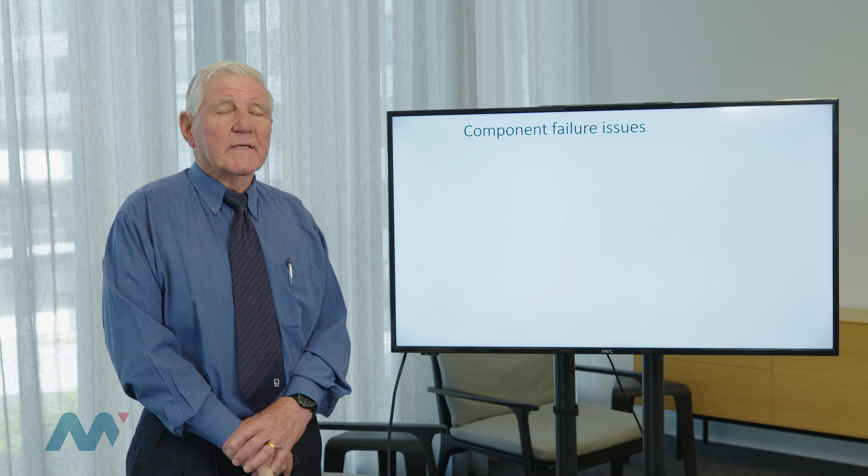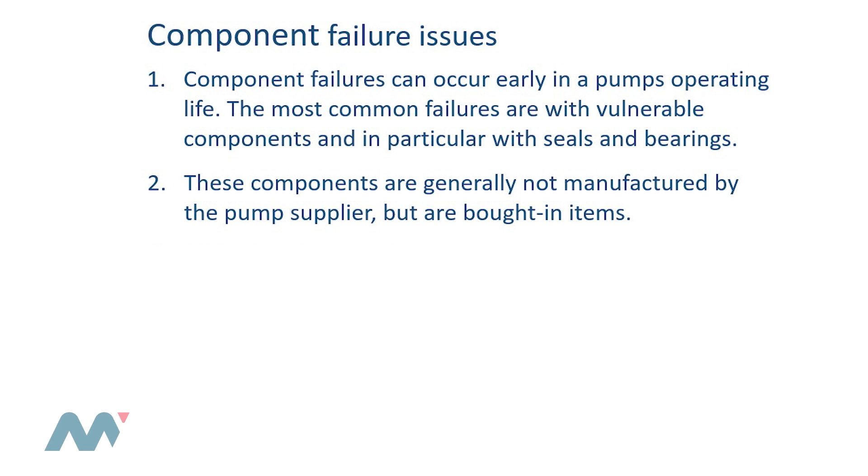So, in particular, vulnerable parts are seals and bearings. These components are not made by us as the manufacturer. They are made by a supplier as a bought-in item. So the quality of those things is within our control, but we're not actually manufacturing them. Most pump parts are covered by the manufacturer's warranty, but in fact, the bearings and the seals, that's a commercial decision that you guys make, how much you warranty those items.

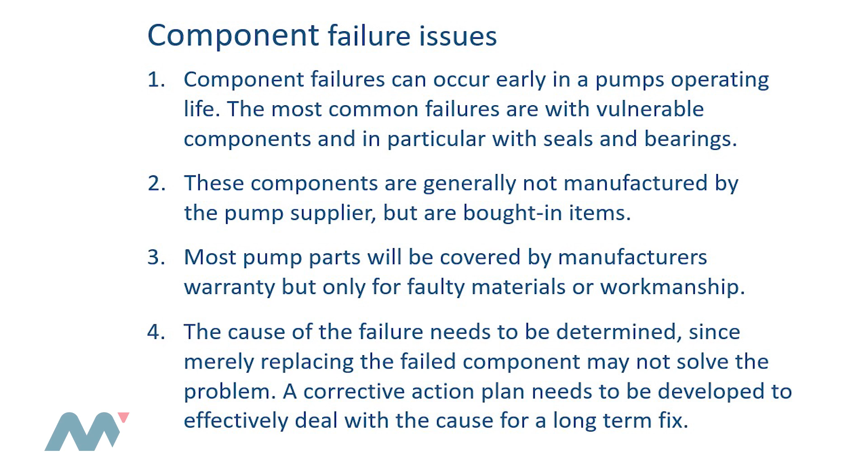The cause of failure needs to be determined, since merely replacing the bearing or the seal may not deal with the cause problem. So you've got to isolate what actually made that seal fail, what actually made that bearing fail, before you can have an ultimate fix on the product.

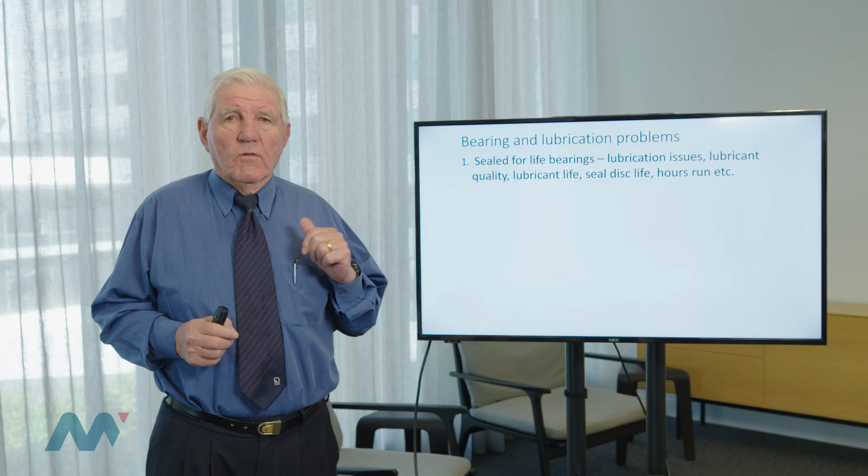Sealed for life bearings. That is, for me, an interesting subject to discuss, because whose life are we sealed for? When you break it down, a bearing is only as good as the lubrication that it sees. And in a sealed for life bearing, we've got an inner ring, outer ring and balls and a cage to hold it in position. We then put in some lubricant, and then we put two seals on either side of the bearing, and we call that a sealed for life bearing. The life could be 5 minutes, it could be 25 years. So what does sealed for life really mean? It's all down to the quality of that lubricant.

Bearing temperatures are an issue. If you've got your shaft that's misaligned, that will heat up the bearings faster than an accurately aligned shaft. So we've got to look at the operating conditions. Are we unreasonably loading the bearings beyond their design point?

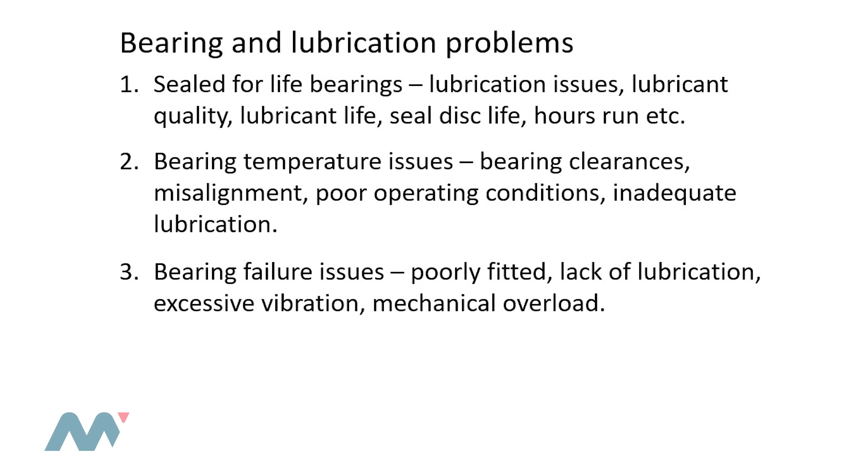Bearing failures are often quite complicated issues because the fit of the bearing rings inside the casing and onto the shaft are critical to the life of the bearing. Normally they're going to be a push fit onto the shaft and a sliding fit into the casing. And in that situation, that's giving the bearing the maximum opportunity to align itself and run smoothly as a rolling element. So we should be trying to avoid things like vibration and mechanical overload on the bearings, and we'll get more life out of them.

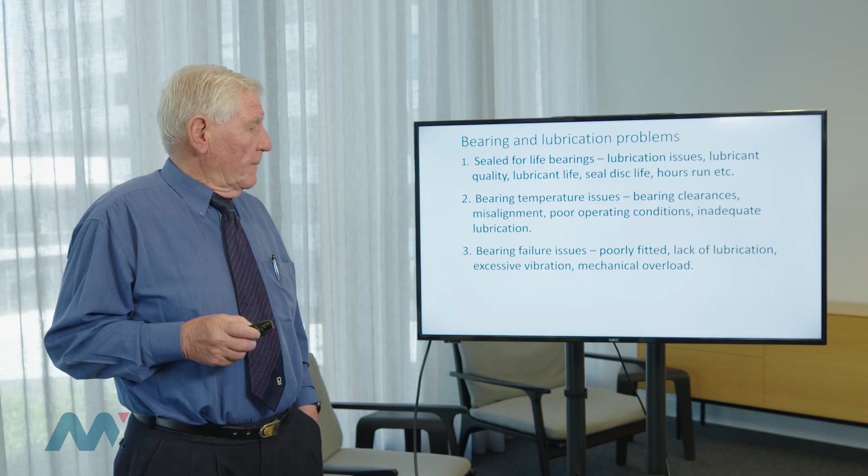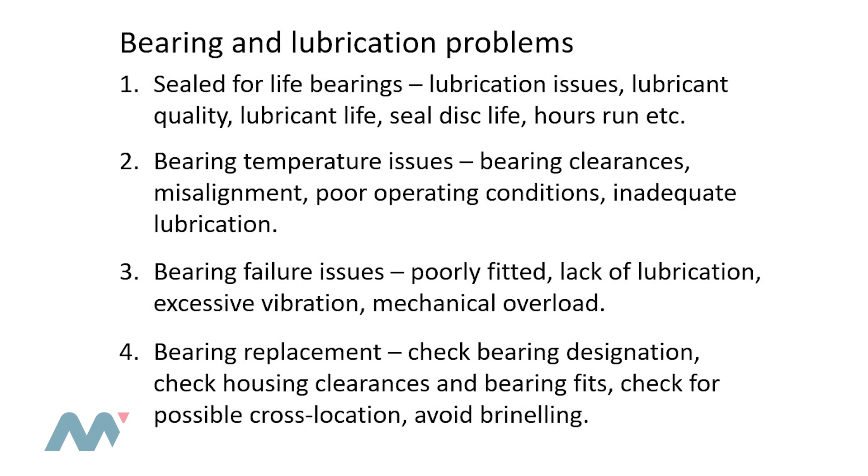When you replace the bearing, check carefully to see what bearing you're actually taking out, because the outer ring will give you the size, a 6306 or 6308. That's the size of the bearing. But it might also have a C3 behind that, or a C4. That is the internal clearance in the bearing, which tells you what will happen if that bearing heats up. So a C3 clearance is larger than standard, and it means that the temperature that bearing can sustain is a little bit higher than one that's got a standard clearance. So all these things you need to be aware of.

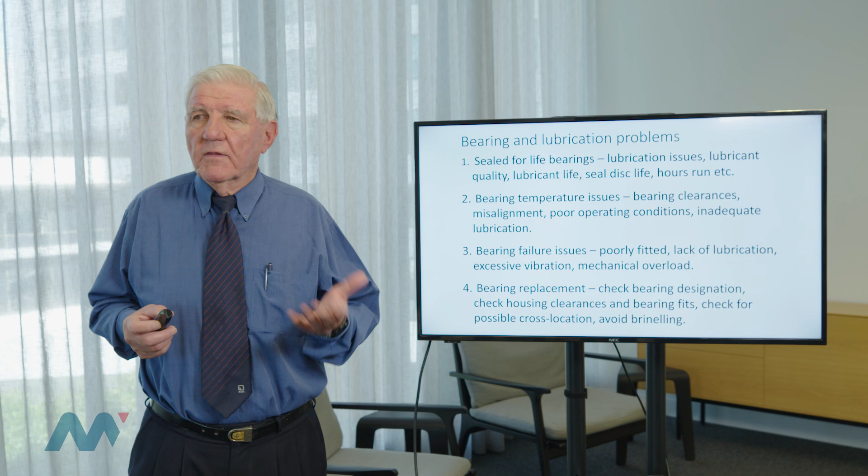Don't just put any bearing that happens to look the same. Make sure you're replacing with the bearing that the manufacturer included. Have a look for corrosion, have a look for Brinelling damage and so on. Because if you put a damaged bearing back, it's almost certain to fail.

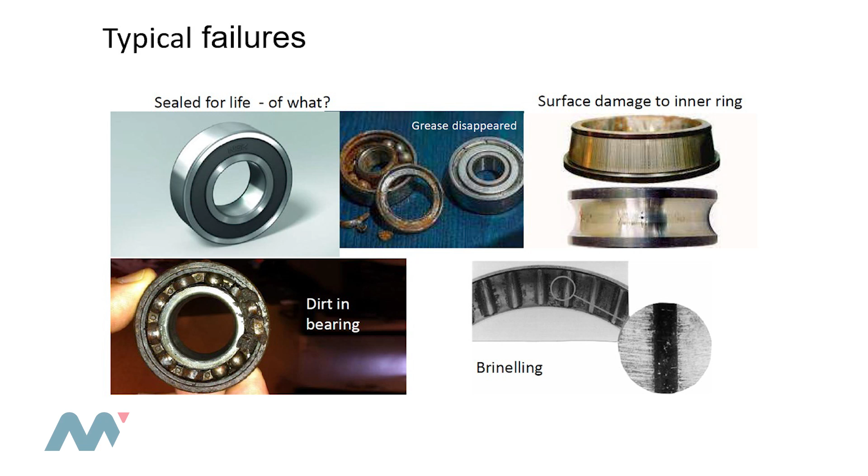Here are some typical situations where bearings have failed. Here's our sealed for life bearing. Here you can see the seals, which are fixed in the outer ring, which doesn't rotate, obviously, and the inner ring is the one that rotates. So there's a rubbing between that inner ring and the seal surface. And behind that seal is grease, and that can be high temperature grease or just standard grease. Look to the pump manufacturer's recommendation for the sort of grease that they use.

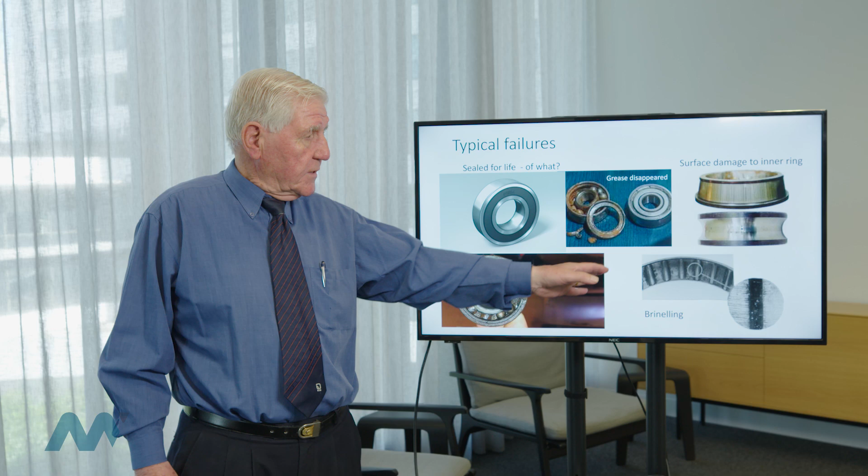Grease disappeared. Look at the state of the bearing. Bearings need lubrication. They're spinning maybe at 2,900 RPM, and those balls get hot without grease. This is sort of standard surface damage. This is Brinelling. That's what Brinelling looks like, and this is in a barrel roller bearing. You can see that the barrel rollers have been stationary, but they've been fretting, they've been vibrating, and they've actually damaged the outer ring of the bearing.

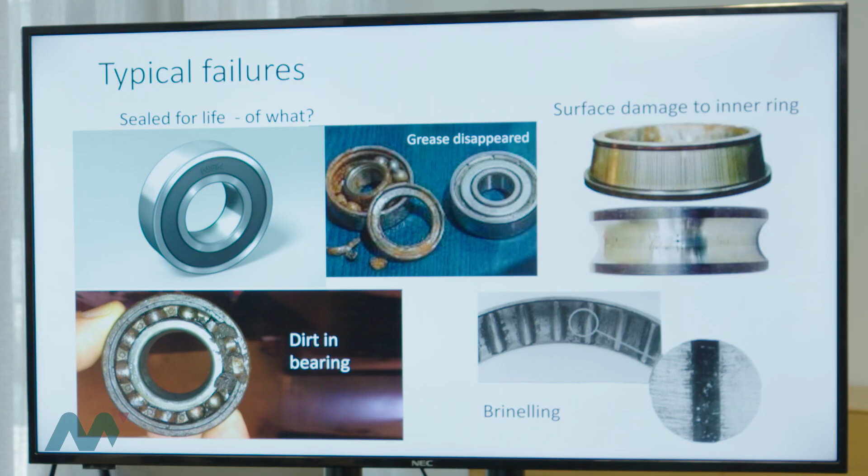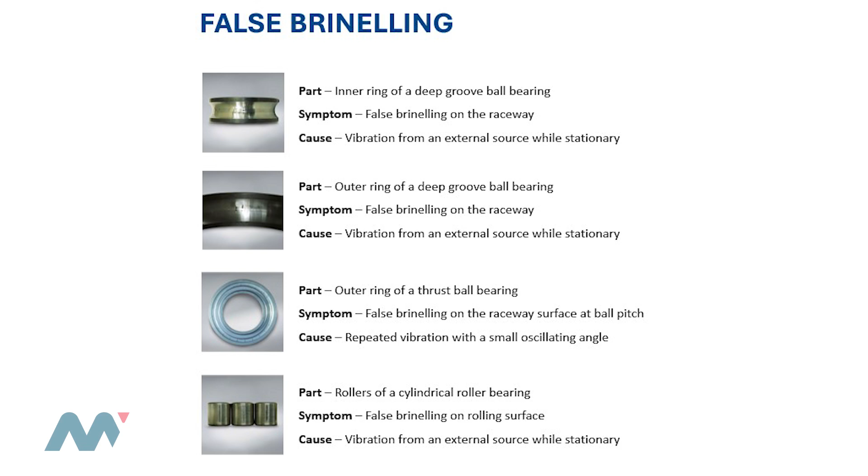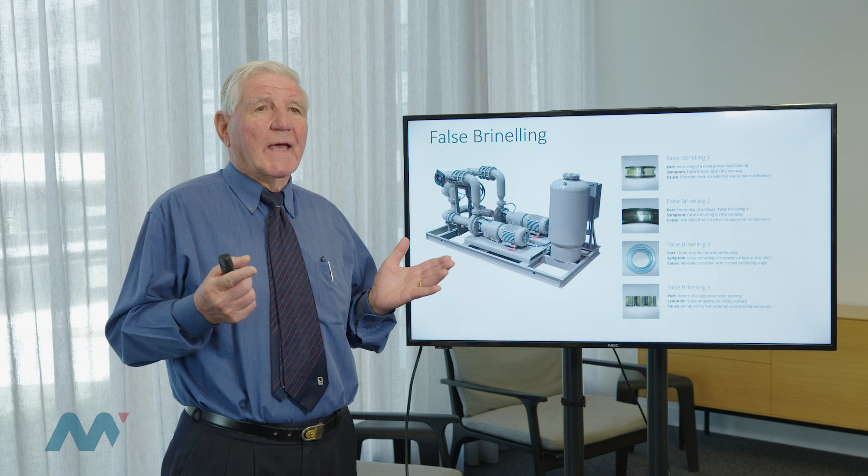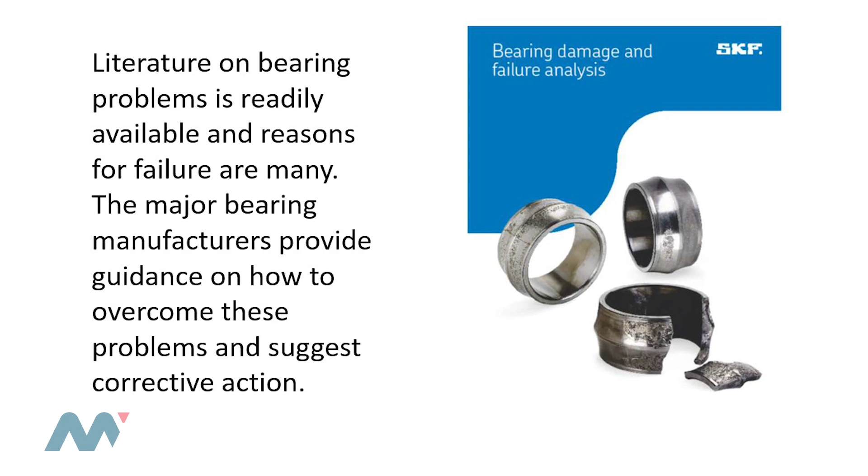False Brinelling. False Brinelling is when we've got two pumps on the same base plate, but only one of them is operating. The one that's operating will cause a vibration, and the pump that's stationary has the potential to generate what we call false Brinelling in the bearings of the pump. This is because the ball in the bearing of the stationary pump is in one spot, and if you vibrate that ball in the outer ring of the bearing, it will cause false Brinelling. You can get literature for failures of bearings, and SKF is an international company. They are the sort of people that can give you advice on why that bearing failed.

So we looked at bearings and why they might fail. Lubrication is nearly always the most common one, but overload is the second. So if you operate a pump away from best efficiency point, you will see that the load on the bearing increases. The further away you get from best efficiency point, the greater the radial load on the bearing.